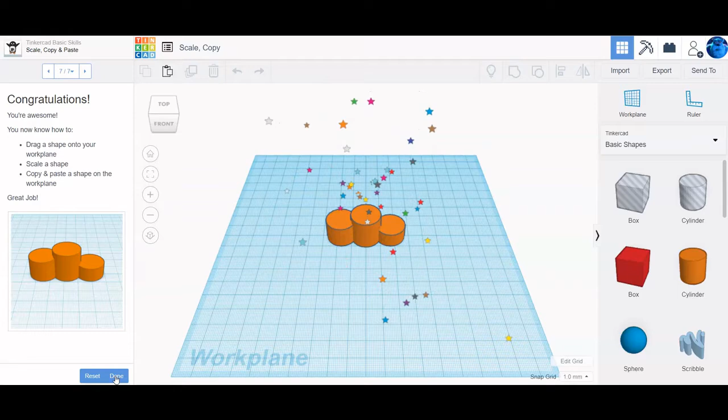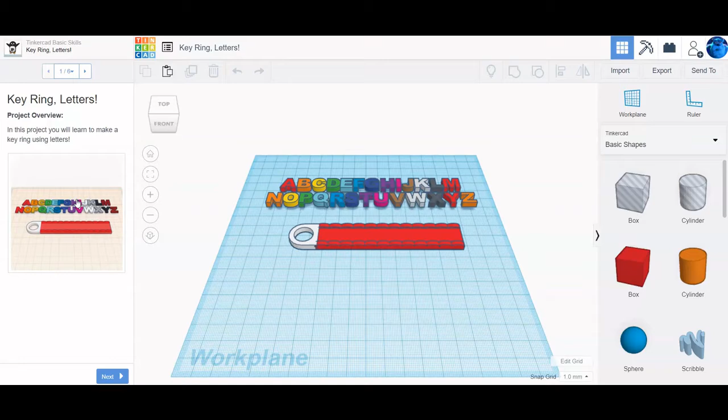We just finished up scale, copy, and paste. We're going to move on to keyring letters. Let's go ahead and get started. In this video, we're going to make something fairly simple: a keyring using letters, just like it says in the title. Let's start out with the instructions.

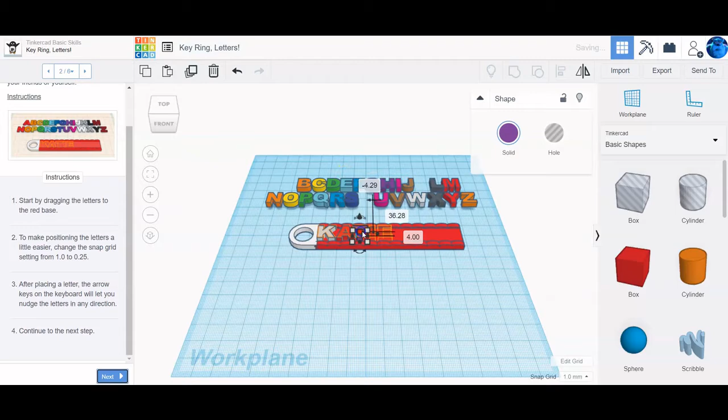It's telling us to start by dragging the letters onto the red base. In this case, it wants us to spell out the name Katie, so that's what we're going to do. We're going to grab the K, move that in, then A, T, I, and an E. Just like that. So yours should look like this at this point, okay?

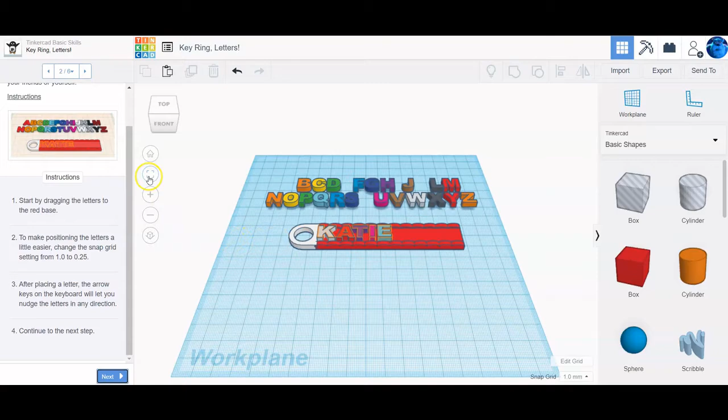So to make positioning the letters a little bit easier, because you're going to see when I zoom in on this, they're not quite set up right, I'm going to click on that red base. I'm going to zoom in on it, and actually I kind of want to zoom in even more. See how they're not really lined up? You can see right here, it should be up a little bit.

So what I'm going to do is change the snap grid, okay? The snap grid is down here. Click on that, and I'm going to change it to 0.25. Now I'm going to use the keys on my keyboard, the up, down, left, right arrows, and click on that until I can get it perfect right there, just like that.

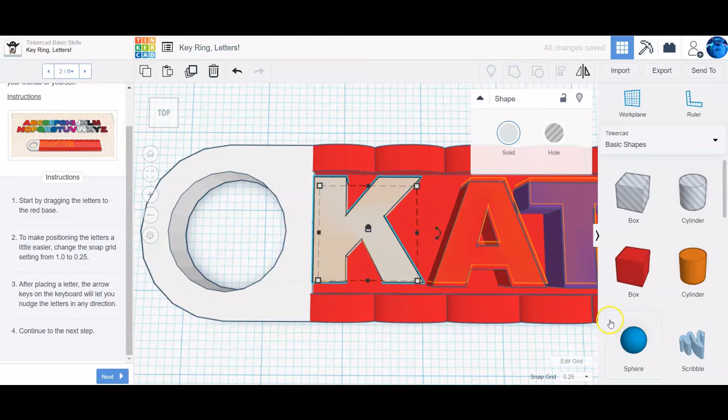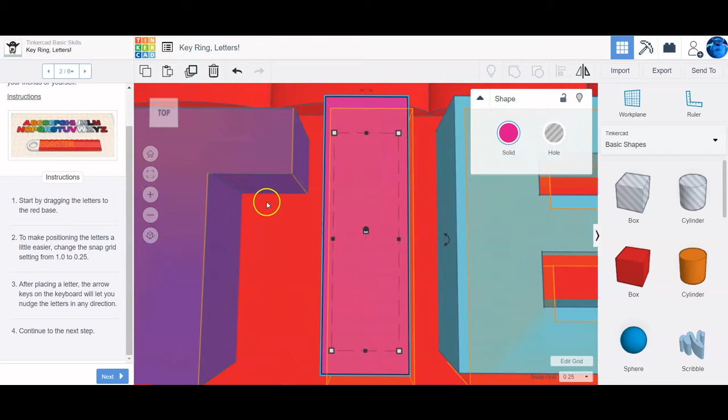Now I'm going to go through and do that for all of the letters. Some of them I got a little bit closer than others. Some I was way off, like this T, I was very far off on that one. It looks like the A still needs to come over just a little bit as well, and the I. As you guys can see, I'm clicking on this focused view right here so I can really fine tune where I am looking on the keyring.

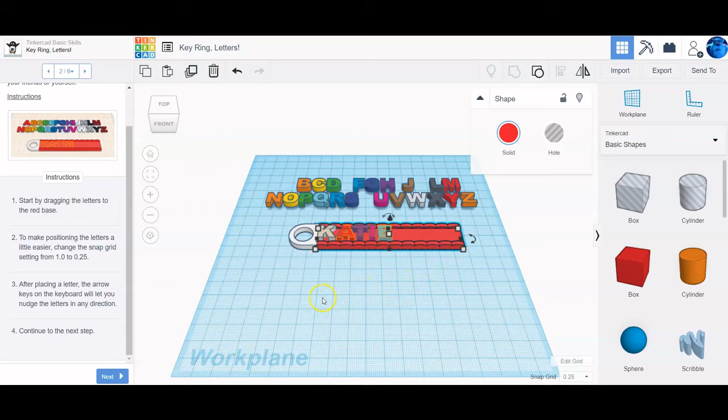So it looks like that one is good to go. Awesome. Now I'm going to click back on home. It snaps me back out to this view. Now that I have them all there, I'm going to go ahead and click next step.

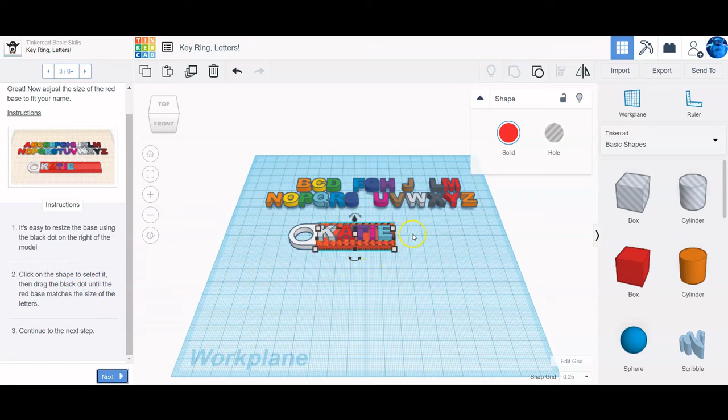So what it wants me to do now is resize the base, this red section, by clicking on this black dot right here that turns red when I hover over it. I'm going to grab that and shrink it all the way down until it's in that orange highlighted area, like so. The reason why we're doing that is because it'd look kind of funny if we had a name tag with all this empty space at the end, right? So go ahead and click next.

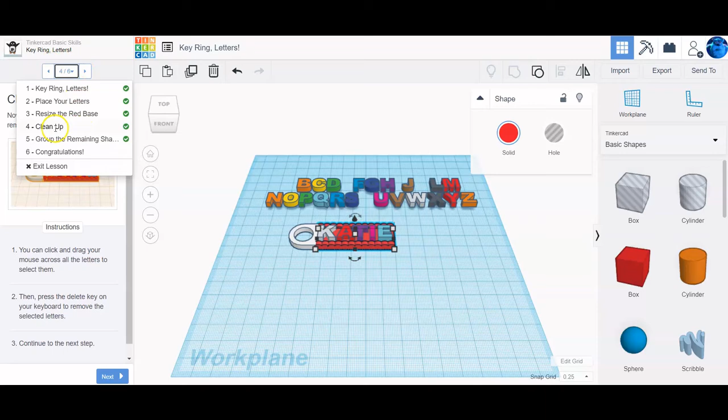Now what we're going to do is take all these remaining shapes. Oh, I think I skipped a part. Oh yep, I did, so we're going to clean it up. See, I knew I missed a step. That's what this section up here is used for. You can give it a drop down and go back to the step that you're working on, okay?

So what we're going to do is clean it up. We're going to click and drag, get that red box out here, and highlight all the remaining letters. Should be 21 of them left, okay? Because we used 5, there's 26 letters in the alphabet, 26 minus 5 is 21, okay?

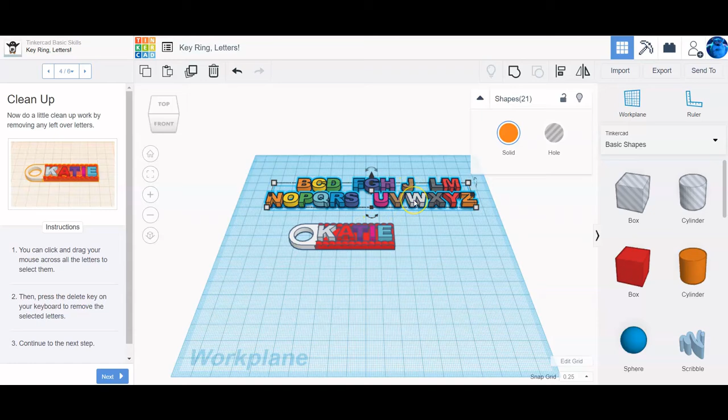And then it's going to be really easy. You're going to hit the delete key on your keyboard, so delete or backspace, to delete them out of there. All right, now we click the next step.

Now we want to select the remaining shapes, so we're going to select all of these. Should be 7 of them, because you have the red base, that's 1 shape, this white hole area, that's 2, and then your 5 letters to make it 7. All right, so shapes 7.

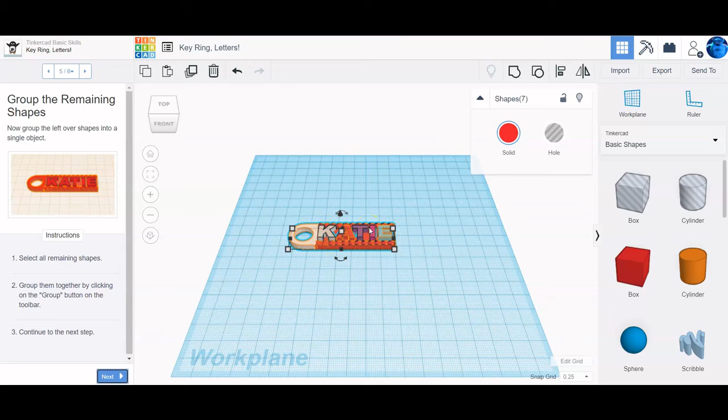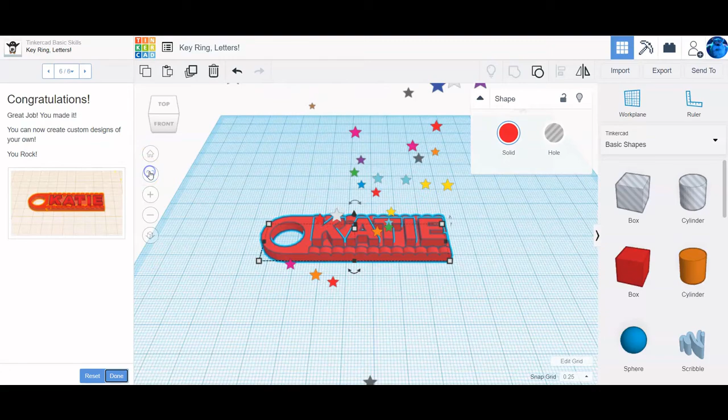Click next. Oop, see, and even I'm missing steps here. With all of them selected, we're going to group them. It should turn completely red. Now we're going to hit next. There's the confetti, that's what we want it to look like. We zoom in on it. That's it right there, okay.